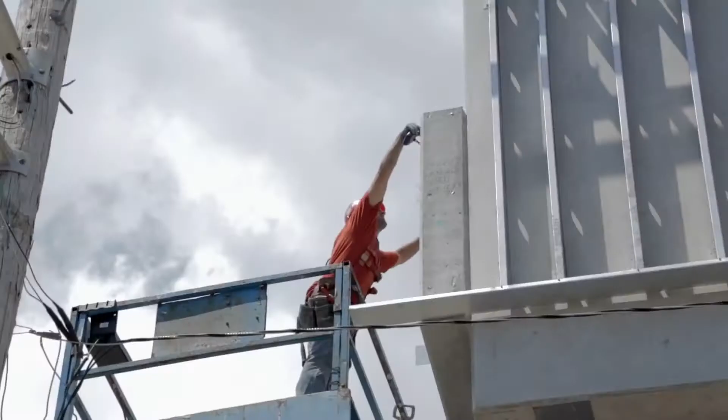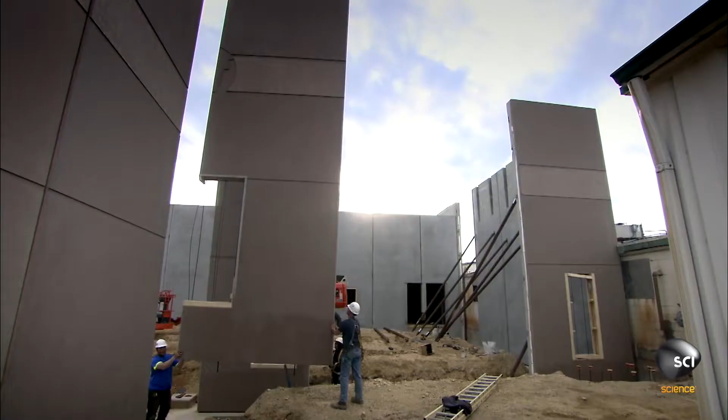Industrialized Building System (IBS) is a term used in Malaysia for a technique of construction whereby components are manufactured in a controlled environment, either at site or off-site, placed and assembled into construction works. It is also known as prefabricated construction.

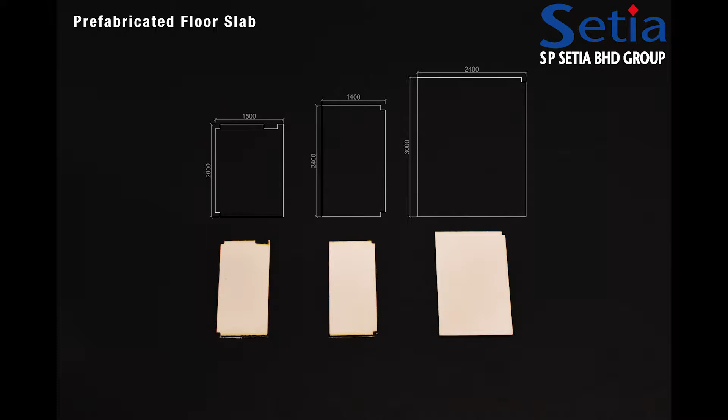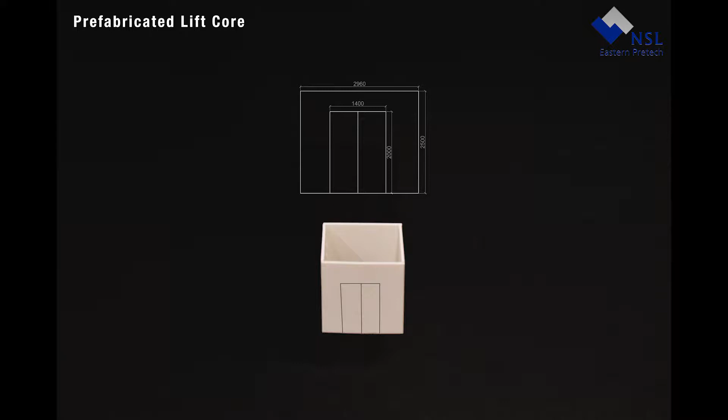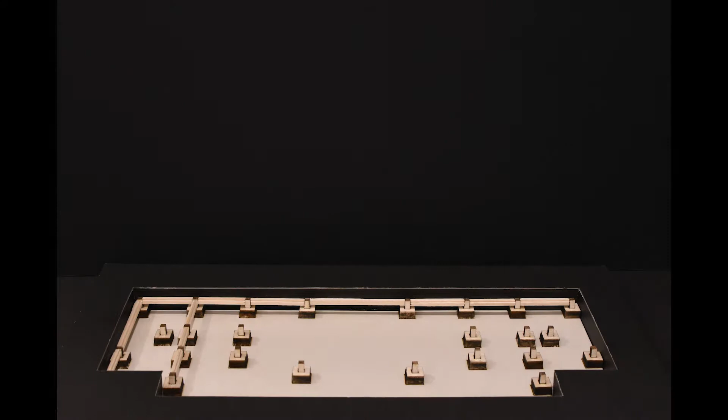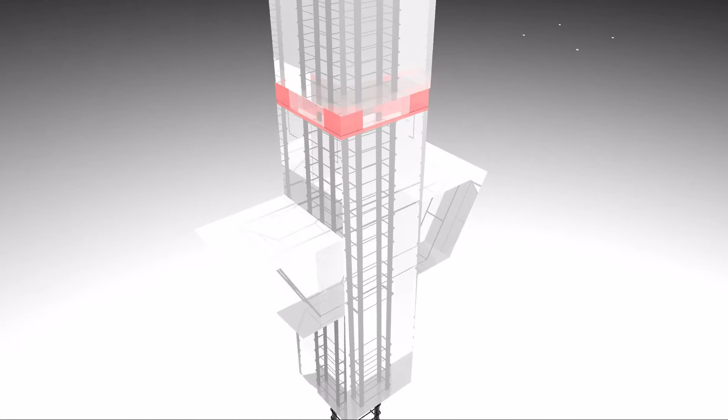The ground is excavated and leveled. Then, pile caps are used in construction of foundation and ensure that pile cap is in correct position. Metal bearing plates and embedded anchor bolts are cast in the end of the column. The connection of column stump to the foundation is steel base plate joint, which metal bearing plates are fixed at the end of the column and anchor bolts are embedded fixed with nuts.

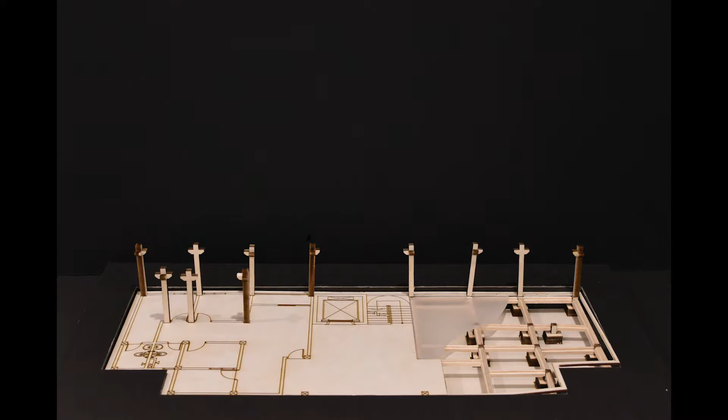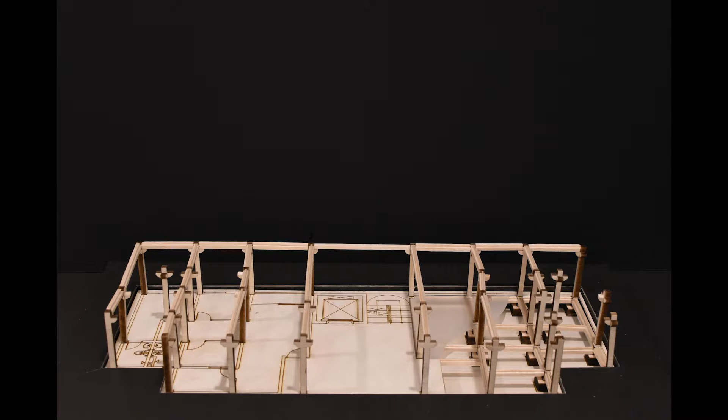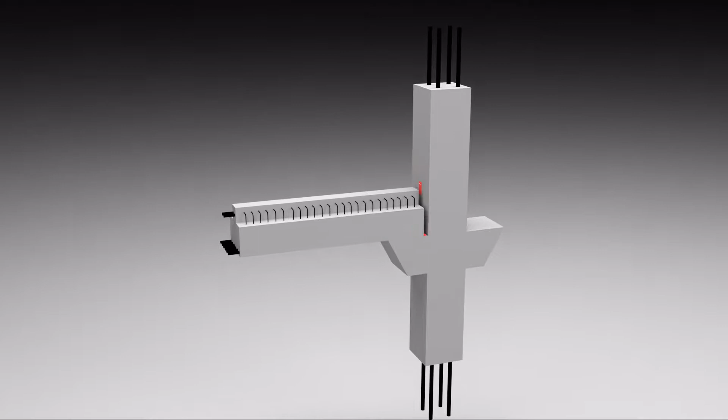Construction is followed by the in-situ reinforced ground beams and ground slabs. In-situ concrete slabs are prepared on-site, which concrete are poured into formwork with prepared welded wire reinforcing fabric. Regarding the column to beam connection, the precast beams are set in place. Beams are set on bearing pads on the column corbel.

Then, precast wall panels are installed. The panels are lifted and positioned by crane. The wall panels are supported by prop and tied with C-channel. Panels are then connected together by using high-strength cement grout to fill up gaps in between after the entire precast wall panels are placed.

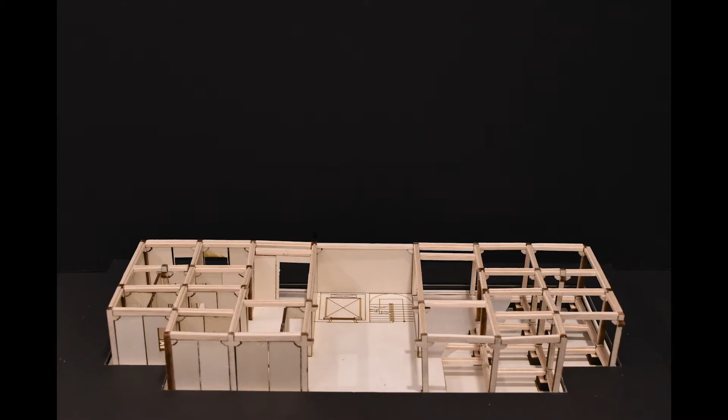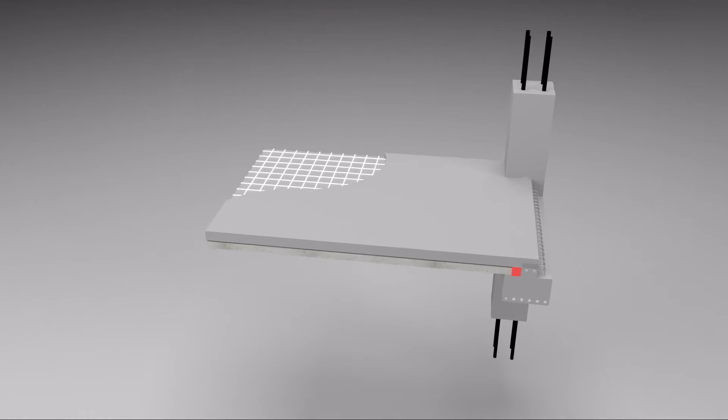The hollow core floor panels are placed on top of the L-beam or T-beam. The hollow core slabs are set on bearing pads, which sit on top of precast beam. Steel reinforcing bars are inserted into slab keyways to span the joint. The concrete is reinforced with RC bars of 16 mm in diameter for longitudinal members, and 12 mm in diameter for transverse members.

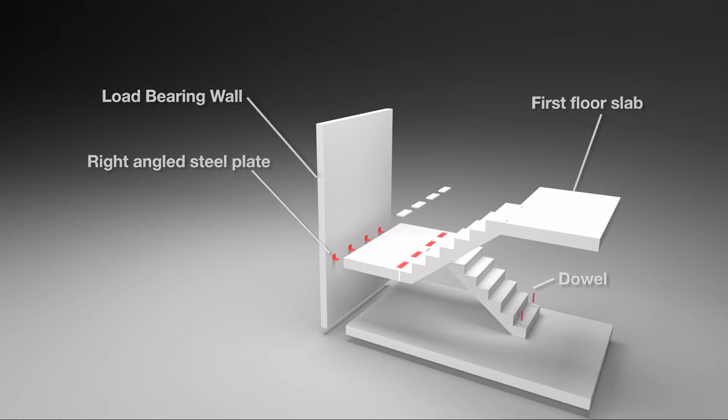Next, precast staircase is installed. The connection of the stairs with the landing is using the tongue and groove method. For the connection of the adjacent wall with the stairs, dowels are used to connect and fasten both the objects together. The concrete staircase is of grade 35 with a ratio of 1:3:5 and has 16 mm RC bars.

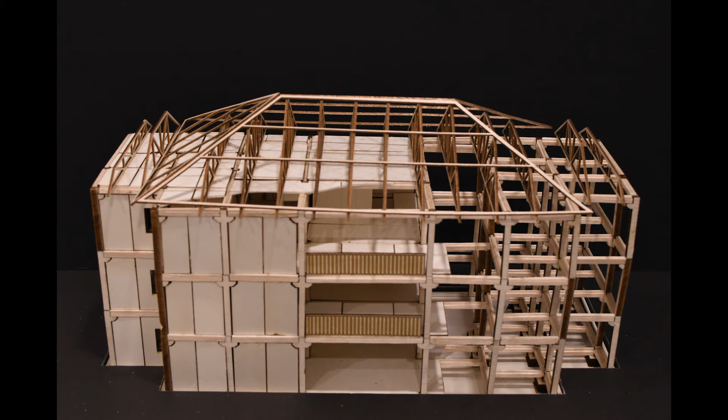Railing posts are inserted to be firmly fixed to balcony structure with fixing plate and handrail connectors that fit into the top of posts. The roof is fabricated on site after the superstructure is set up. The main structure of the roof is a steel truss and the small C-purlin is positioned above the truss by using I-plate. A layer of netting was laid to secure the rock wool in place, then followed by aluminium sheet. The corrugated metal deck is then placed as a finishing layer.

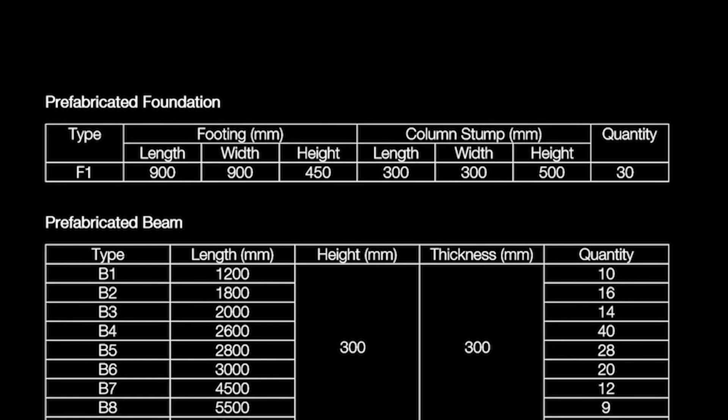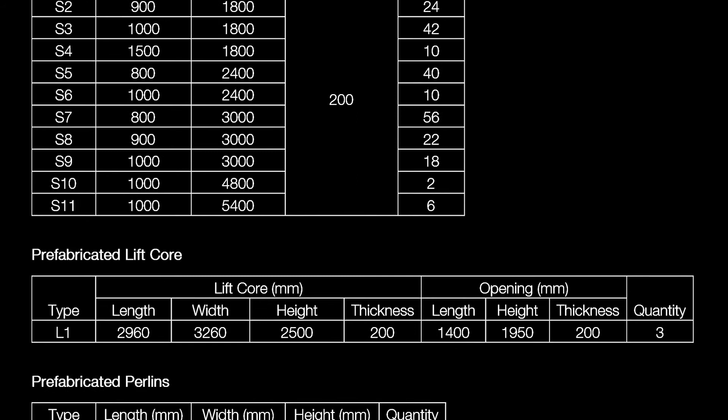As a conclusion, the IBS method uses up to 80% less labor, increases productivity and is 7 times faster than normal block work. This construction is also precise due to the factory finished products. Besides, it results in a cleaner site and reduces wastage.